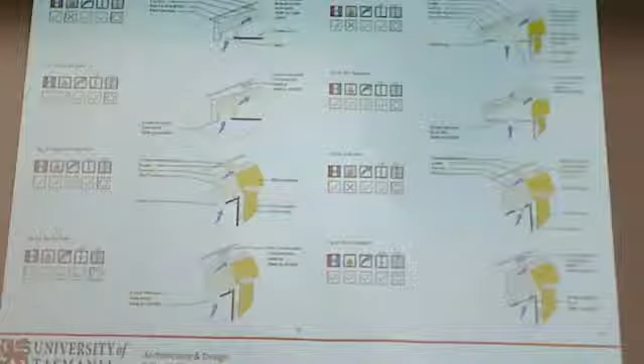If I do this, I'm being edited. Sorry.

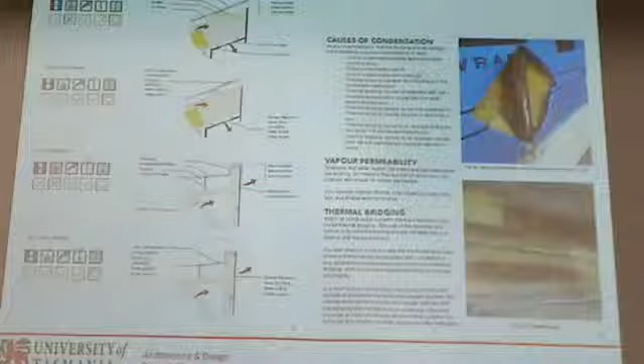Thanks for coming along. So this bit, this is not the slideshow. This is a booklet we finished a week ago, and so it's not finished. I'm probably going to look at it again in about a month's time and see all the things that are wrong with it, and come back and just tidy up a bit of text and organisation. But generally speaking, it's correct. So if you want, flick me an email and I'll send you a PDF copy.

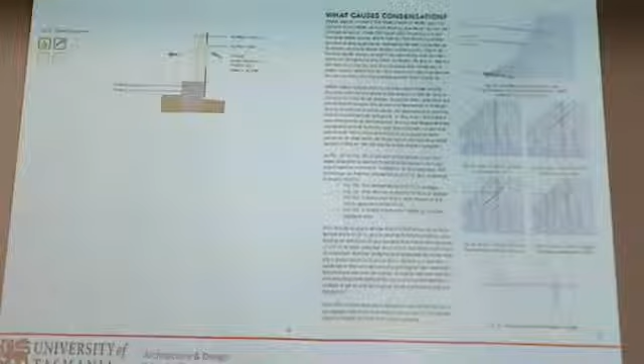We've been doing research for the state and federal government for the last 7 years on condensation and mould in Australian buildings. And as part of that, given talks in Darwin, Perth, Bunbury, Brisbane 3 times. South-West Queensland has huge problems. Sydney, Melbourne, everywhere except for Adelaide. But Adelaide's got a nice dry climate. So that's what that is.

Yeah. Got nice beaches though. So that's what's been playing in the background. So I'm happy to email that out to people. Yes. We can do that. I'm in this room. It's old fashioned. Yes. That too much or not enough? Oh, yeah.

I love that. Good. So this talk is going to be not a dog's breakfast, but a bit of variety. I originally started with is energy efficient housing a health hazard, and it is. There are lots of issues with that. But considering who might be coming tonight, I made it a bit more general as well. So I'm the nexus of how to design low energy buildings, how we empirically validate that, and how buildings are built. Empirical validation is how we measure them. Most of our regulations now and probably into the future are about how we design them, and there's very little measurement of how that should work.

And I get lots of award-winning buildings, which are based on a design, but how that should work's a different story. And then how they're built. In that context, a recent review in Victoria found that more than 80% of buildings were non-compliant, meaning that we've got the building regulations, which are the minimum requirements for construction, and 80% were built less than code. And that's not just energy, but other aspects as well, fire escapes, toilets, all different things that were not compliant.

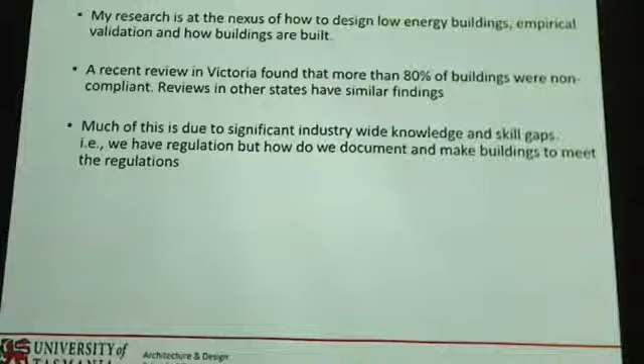The problem is there's two sides to improving compliance. One is training, and training is actually going the opposite direction, getting less and less. The other side is inspections: the people who do the inspections need to actually know what they're inspecting, and a lot don't at this point in time. And inspections are going to cost money. Every time that's mentioned, the affordable housing flag gets waved, and that's the end of the story. But the fact that 80% aren't built to code doesn't seem to matter. So we have this to and fro.

And yes, yep. The likes of, what's it called? Grenfell in England. 3/4 of large high-rise buildings are non-compliant in Australia at this point in time, including many public buildings in Tasmania. So, yes.

So as informed Australians, we acknowledge the need to reduce carbon emissions by improving the thermal envelope and equipment performance of all buildings. However, since 2004, the focus in Australia has been on stars and watts, as in watts per square metre, without a deep understanding of how the building works as a system.

I'm sure you've all seen these sorts of images, how our CO2 emissions keep going up and up and up. How our ocean temperature is rising, and was it on the news last week, tropical fish that used to exist 3,000 k's north of New Zealand can now be caught off the waters of New Zealand. So a fraction of a degree, and that's what we're talking about, a fraction of a degree increase in ocean temperatures has a huge impact on the whole planet.

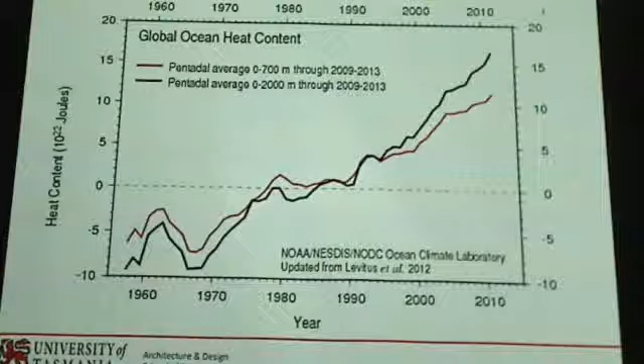75% of the planet is oceans. So what's happening on the land we're on is quite small compared to what's happening in the oceans. And I guess it's like you take a glass of water out of the fridge, and if you had a really good measuring device, the fraction of a millimetre, as we leave the glass on the table, it actually increases in size because the water's warming up. And so think about it at a planetary level, and that's a significant issue.

The other issue is this: Australians still have the biggest houses on the planet. So we talk about climate change, but we at the same time have the biggest houses. So it's a bit of a contradictory statement there. And then we take it down to what's that mean at a square metres per person. So Australians have 89 square metres of house space per person. So that's bigger than this room per person on average.

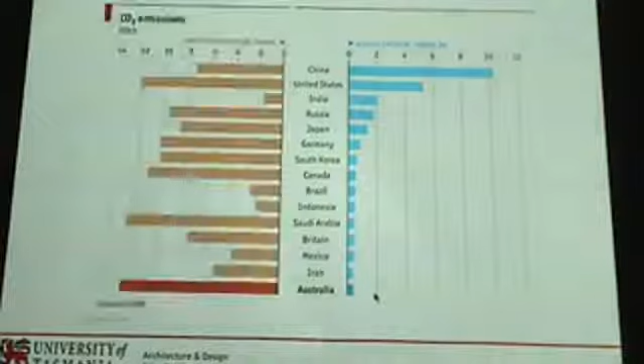And then this is the thing I guess we often see from the government's perspective. Oh, Australia's not doing anything. Look, we're tiny. We're doing this. We don't count. Iran makes more. But then when you actually flip the coin and say, what's it mean per head of capita? And Australians are the worst carbon emitters on the planet. So that's an interesting situation in itself.

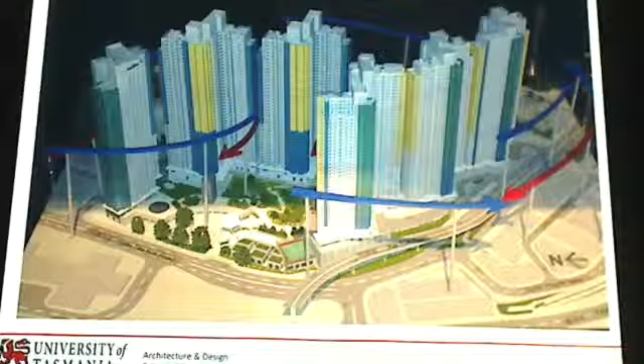And every single room has access to daylight and access to an operable window. Now that doesn't happen in Melbourne, doesn't happen in Sydney, doesn't happen in Hobart. We have many apartment buildings where you can be 3 or 4 rooms in from where the window is. So Hong Kong has better regulations for apartments than Australia. So, yep.

Hobart is one of the most unsustainable cities on the planet. And that comes back to that same reason. The population of Hobart's about 200,000, but the land mass that's occupied by Hobartians is phenomenal. So it's one of the most unsustainable cities on the planet. Might be a nice city, but it's extremely unsustainable.

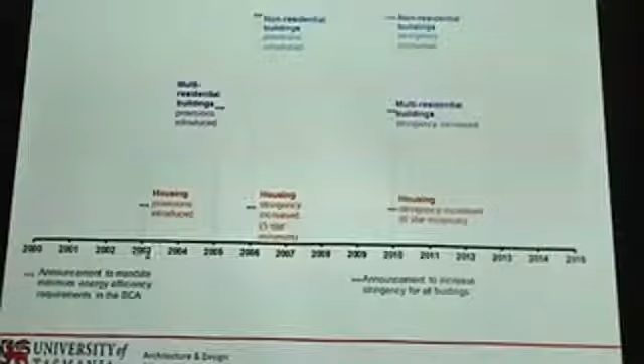And so regulations: in 2003, we had our first regulations regarding, we need to do something about energy in buildings. It was talked about in 2000, but it took to 2003 to put it in the regulations. In 2005, 6, 9 and 10, we've had various improvements, or a desire to reduce the energy used for heating and cooling in buildings.

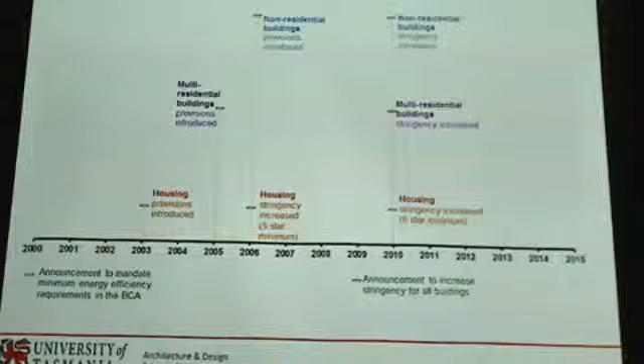And more recently in 2016, more aspects about hot water and insulating hot water pipes. Some hot water pipes. I went to a house the other day and not a single hot water pipe was insulated. So we're happy to heat the water to 60 degrees and then let it sit in pipes that aren't insulated.

So that's where we're going. And at the moment, the next code is in 2016. It's coming out at the end of this year for action in May next year. At this stage, there's no changes in the energy requirements in residential buildings.

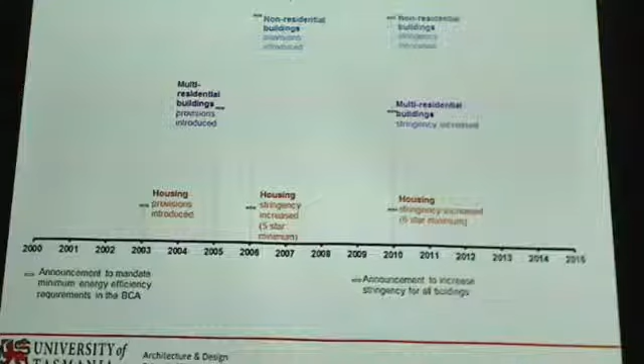What it is, thankfully, or at last, there's been lots of broad statements. You must use natural energy, or your house should not leak so much. And hopefully, if it passes all the different approval processes, we'll have some numbers in there about what that might mean. So it might state, for example, that your house might only be able to have 10 air changes per hour or something as a number that we can actually use to say, well, it is or isn't.

But this is, I guess, where the challenges we have within regulation. The greeny brownie colour, it's not brownies, it's more green than yellow, blue, green, brown. Architects get stuck on colours. Khaki, thank you. I like that.

We're talking about residential buildings, energy efficiency, thermal performance, orientation, ventilation, thermal mass, insulation and glazing. And I guess the challenge there is that all that stuff on the outer edge, there's no regulation. Okay, that's fine. Sorry. So, we can see the electricity system, reliability, affordability, sustainability, green power. At this point in time, the focus is on low energy, more so than what's actually the source of energy. We're lucky in Tassie because we've had our hydro system and a significant amount of our power generation is renewable. But other states aren't as lucky.

Vehicles, what type of fuel is it? I've been driving cars that use 4 to 5 litres per 100 kilometres for the last 8-9 years. But there's still a challenge. We've got a Honda at the moment. When we bought that 4.5 years ago, most of the cars of its size were using 10 litres per 100 kilometres. We were more interested in the look and the apps on the car rather than how it's impacting on climate change and fossil fuels.

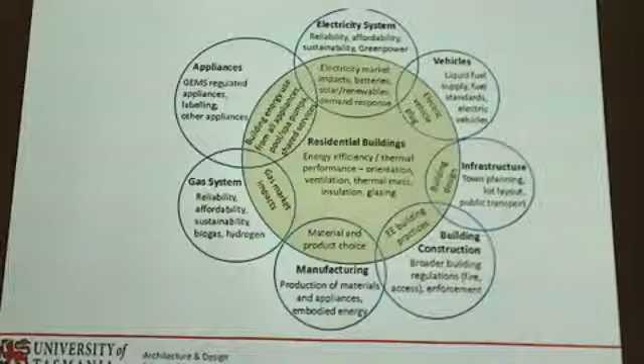Oh, I know. No. And they're not designed for universal access either, in terms of when you break your leg or you want to stay in the house and get old. Exactly. Yes, I agree totally. And then not compliant as well.

And then we say, how do we actually start to quantify delivered energy? Is it brown power, black power, green power, yellow power? Okay, we make more energy than what we use, but how is it exported and how does the system manage that? At the moment, it's not really managed that well. And then within the building, how are we managing our own energy use? So as we're moving down this pathway of people wanting to get points for this or points for that, there's these questions about how we're actually trying to quantify things.

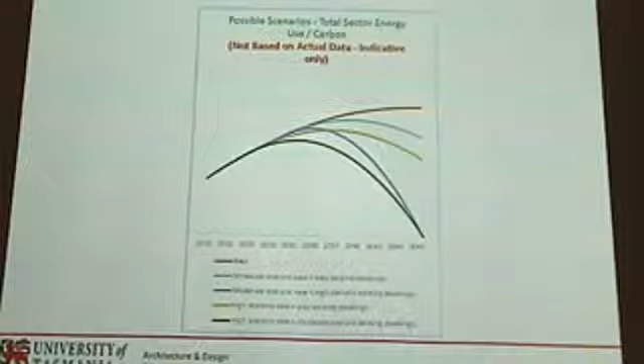And then there's this one. I call this the skeleton in the closet. Actually, these 3 slides I've just shown you won't be in the PDF version because I'm on a national committee and that's how I've got them. But this one shows that, at this point in time, if we're good and we have lots of regulatory change, our new buildings in 2040-ish will be zero energy.

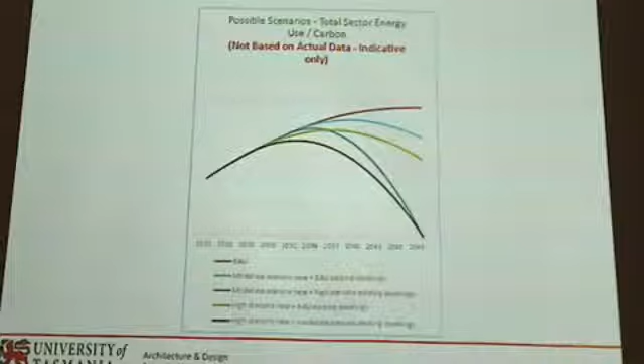Who's going to be here in 2040? Oh, yeah, yes. Okay, right.

So all the hullabaloo about desperate need for action on climate change, well, by 2040, we might be making new buildings that are required to be zero energy. So I'm just looking at the sea level rise and the ocean temperature rise, and it's going to keep going up. And that's just buildings.

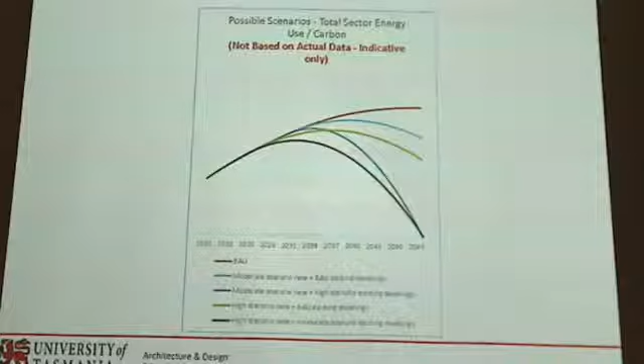Before we start talking about houses, commercial buildings, what cars we're driving, what trucks we're driving, how many highway miles we're doing, whether the mobile phone that you're using with rare earth materials gets thrown away after 2 years, all those sorts of aspects. And I'm blaming China for not accepting our recycling rather than asking the question, well, why do you have recycling in the first place?

So this is where we were not that long ago, and at our commercial spaces, we're pretty much similar. It was about 2 or 3 degrees difference between inside and outside, and we dressed appropriately, like this building.

And now we do this for houses, and commercial spaces are getting more ritzier and ritzier. So at the same time, we've had significant changes in our expectations, significant change in our building practices, huge changes in our built fabric. And the BAL is about bushfire attack level and how that's impacted on materials used in construction.

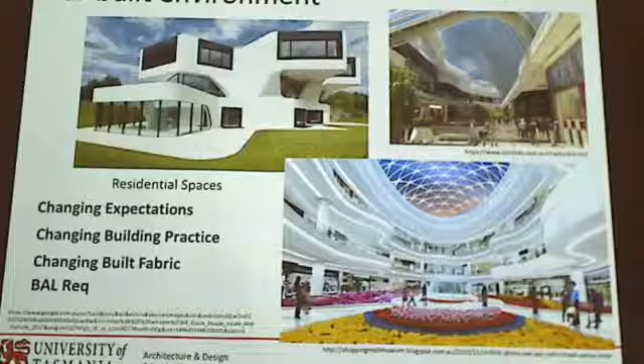This is a window in a house we did a few years back. That's a double glazed window, and that's a rammed earth floor on a 2nd story. So that's what we call a suspended rammed earth floor on a timber frame, the stuff you do.

So we have to think about thermal conductivity, that's the rate at which heat flows through buildings. Thermal mass - so where is it, how is it, how much, is it right? Insulation - so how do we think about insulation? Framing factor - that's the amount of framing material in the wall. And I talk later about what we call thermal bridging, which fits in with this, and what the insulation property of the framing is compared to the insulation value of the insulation.

Client would like it, and we liked it. Thermal mass-wise, yes. Yes, on a timber structure. No, you can't, sorry. Air tightness - and when people talk about air tightness being unhealthy, I'll tell them to go jump in the creek.

Vapour pressure management, which is about water vapour, we'll talk about that in a little while. Thermal comfort - most of the developed countries have minimum and maximum temperature requirements inside housing. We don't. We prefer unhealthy housing.

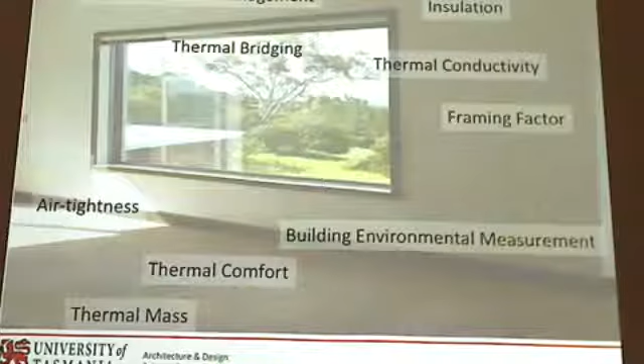Building environmental measurements - okay, we're going to do this, but are we actually measuring it to prove we've actually achieved what we wanted to achieve?

How we're simulating buildings - and I guess people who tinker in the house space look at star ratings, and all that's doing is simulating a particular scenario of the envelope of the building. It's often up to 30% different to reality, but it's purely a regulatory tool to compare apples with apples.

Human health, building regulation - that's stuff with the buildings. Go left of field now, Papua New Guinea.

And so reduce unwanted heat loss and heat gain by using insulation. So that 120 mils of grass on the roof has an R value of about 4.5. That's what's required in a brand new house in Tasmania. The wall is 110 mils thick, there's an R value of 4. That's nearly twice what's required in Tasmania in a new house.

Yes, yes, it does, yes. Shade solar radiation from surfaces and stop them getting hot. Yep, it's got nice big eaves to stop the sun hitting the facade. I'm seeing more and more houses in Tassie where there is no eaves and the facade receives full solar radiation.

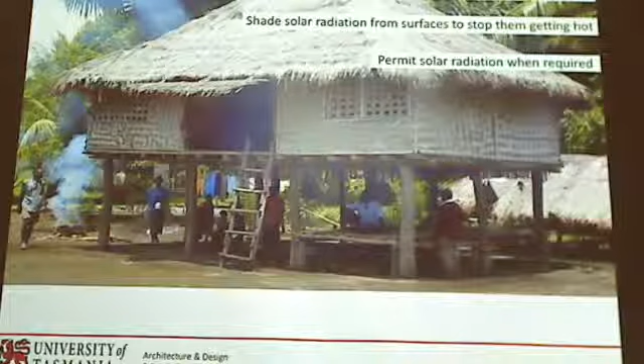Permit solar radiation when required - not really for there, but definitely for here. Appropriately sized and placed ventilation - yep, big openings, cross ventilation, lets the building, lets what heat is in there out.

Appropriate access to daylight - well, they go downstairs, where there's more daylight. Appropriate location of thermal mass - well, this is in a warm climate, there is no thermal mass. You don't want thermal mass. And appropriate amount of thermal mass? Yes, yes, yes. Cooking and other things happen down here, yes.

The larger the surface area per volume of material, the more rapid the heat flow. Now what that means, this flat surface here, because of its access to currents, it loses or gains heat much slower. The grass, how it's all woven, absorbs and releases heat much quicker. The rammed earth question before - rammed earth is more porous, absorbs energy quicker, releases it quicker.

Lots of different things. A brick wall that has the bricks stepping in and out absorbs energy quicker than a flat brick wall, or a rendered brick wall is even worse. So how about you think about materials in that context? Renewable resources - yep, the storm can blow, it blows away, get in the paddock and get fresh materials.

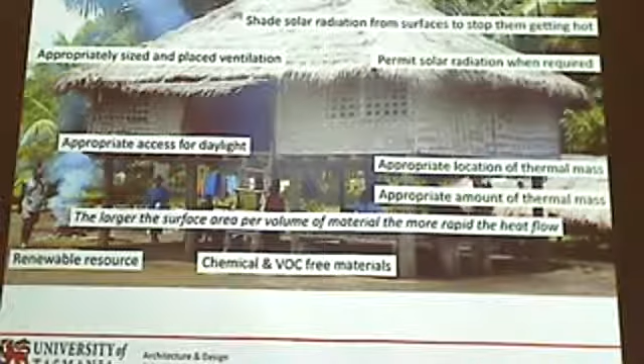Chemical and VOC free, yep, not like here. We've got formaldehyde, all sorts of volatile organic compounds that we're breathing happily, helping us die of cancer.

Carbon storage, yes - the carbon from the paddock is in the straw and the logs. Embodied energy - it's got very low embodied energy, which is the amount of energy required to make construction materials.

Carpet is one of the highest embodied energies, and so is paint. If you have a timber frame window, that's great, but in 2 or 3 years' time you give it a coat of paint, and it's now created more carbon than an aluminium frame window. So just being aware of the greater circle of things.

Embodied water - well, this is just paddock grass made into a house. I think it's like 30,000 litres to make 1 square metre of plasterboard.

So, materials - this is something I've been tinkering with quietly in the background regarding Tasmanian housing. There's very limited information available, or there's some remnants around the place.

But whenever you read, what was his name? Robinson - thank you. When he went there, no matter what season of the year, it was comfortable inside and warm.

So they had the thatched grass, they were a stressed structure. These poles went 2 foot into the ground, and as you can see, they actually went over - so it's called a stressed skin structure, which the British weren't doing until very recently. And then the grass and other layers happening on the inside. So it's interesting what was happening here before we came and tore it down.

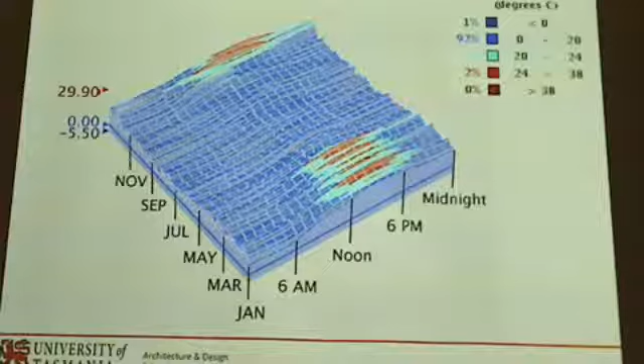If we're in Darwin, it'd be 23 to 27. So there's a bit of variation, but that shows that only 5% of the hours in a year we could walk around and think, yeah, without too much worry. Only 2% gets hot - that's right - and then 93% of the time it's cooler than what we would like.

Talking with the people from Aurora that we work with, the use of heat pumps in summer is phenomenal - for heating at night and cooling in the day. The energy doesn't drop, it's constant. So it's interesting in terms of what's happened in modern housing.

So what does that mean? Regulation. The National Construction Code goals are for a nationally consistent minimum necessary standard of relevant safety, structure and fire, health, amenity and sustainability.

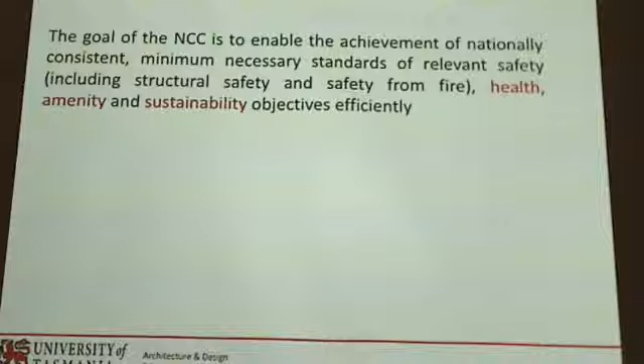So health and amenity - what does that mean? The National Construction Code is a document that follows a democratic process. It's a good example of democracy, and it's coordinated by the Australian Building Codes Board for state and territory governments.

And so in that context, the most seen and heard lobbyists achieve the greatest regulatory outcomes. That's democratic, yep. For every minister in the federal government, there's 2 coal industry lobbyists. There's 1 solar power lobbyist for the whole of government.

I was saying before about the issue of inspections to improve compliance, having more inspections. If every person is saying we need that, there's an entire workforce from particular building representative bodies in Canberra saying that'll make houses unaffordable. So, that's the democracy.

So if we want change, we have to be heard more. That's the best way of saying it. Yes, with a person who has balance of power. Politics.

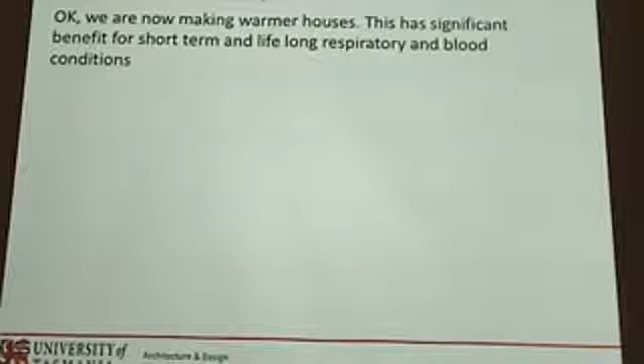But how do we count energy? How do we count comfort? Are we considering air quality? Are we considering water vapour? And by the way, what are the ideal conditions for mould to spore?

Okay, so we've warmed the houses up. What temperature does mould grow? Any ideas? Over 20 degrees. Oh, so we've now created a better condition on one hand, but on the other hand, we've now made this awesome breeding ground for mould.

This is a statement from overseas I'll put later in the talk too: buildings are often not used as intended by occupants. So designers and builders need to err on the side of caution and adopt robust, fail-safe built fabric solutions. It's the role of the built fabric to manage these issues, not the occupant.

So I guess, how many people are in the living room? Does the building regulations say how many are in the living room? Does it say how many people are breathing? Does it say that a living room of this size is for 1 person, 2 people, 5 people?

When we simulate buildings, it has presumed internal heat loads - a certain amount of energy created by laptops, computers, mobile phones, stoves, fridges. These were all presumptions based on averages. So the moment you have a bunch of friends over for a party and there's 20 people in the living room, that's 20 people breathing, 20 people giving off water vapor, 20 people's heat load. Rarely does any room operate as per our regulatory beliefs.

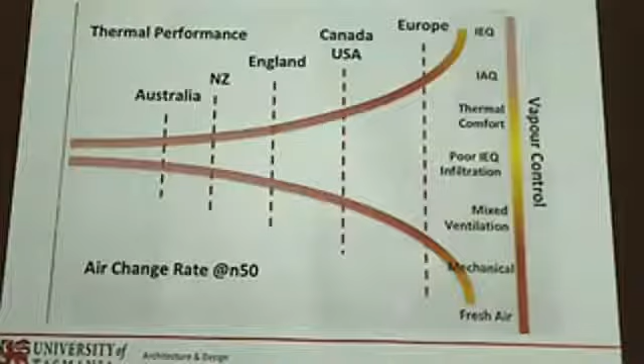So indoor, I'll just go through what those two terms mean. Indoor air quality refers to the air quality within and around buildings, so in and around, and structures, especially as it relates to the health and comfort of building occupants. Understanding and controlling common pollutants indoors can help reduce your risk of indoor health concerns.

And indoor environmental quality encompasses the conditions inside a building, air quality, lighting, thermal conditions, ergonomics, and their effects on occupants or residents. Strategies for addressing IEQ include those to protect human health, improve quality of life, and reduce stress and potential injuries. Now, that's the regulation in Europe.

And so that sort of context of what we're talking about, oh, you might need to put some batts in the wall. They're talking about, no, it's what the health of the occupant is. How do we have a building that provides a healthy outcome? So

We think about energy flow, or the envelope energy flow. We have walls, windows, doors, thermal bridging, and that includes infiltration. Infiltration is thermal bridging. Solar shading, solar gain, energy storage. Envelope durability, so how are we managing water, water vapour, thermal bridging, and fabric ventilation. So that's the way the building can breathe. So how the subfloor, the roof space, and the walls can breathe.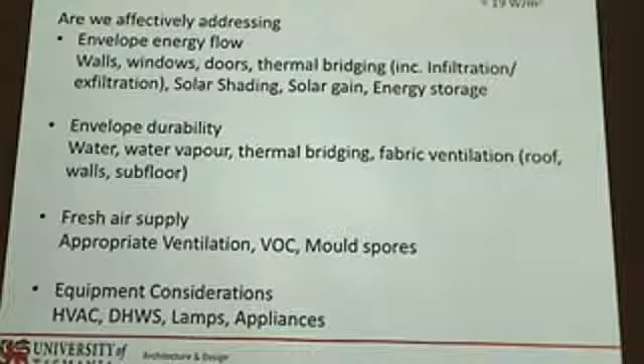building leakage. And so if the ground is on average 12 degrees Celsius, when the air above it's cooler, it's giving that warmth to what's above. And if the air above is above 12 degrees, it's going into the ground. So just understand those basic principles of energy. Yep, that's the ground heat. Yep, that 12 degrees. Coming back, I could probably go back to that graph and look at how many hours a year the air temperature is less than 12 degrees in Tassie. Yeah.

Oh, we find that at about 1.2 metres, and stuff we've measured up at Newnham, we get about a ½ degree variation every year. But that's at 11.8, about 12 degrees Celsius. And I don't want my house to be 12 degrees Celsius. Yes. But you don't want your house to be 12 degrees Celsius.

Yes. And that's one of the challenges, a lot of old books from the 1970s, before we had our expectation of comfort, things were very much about solar orientation and lots of mass and even burning. But a lot of people refuse to live in those houses now because they're too cold. Or they've retrofitted air conditioning, and because there's so much mass, the amount of energy required to condition the mass is significant. Yeah. Hydronic. Yep. But once again, it's energy to run that.

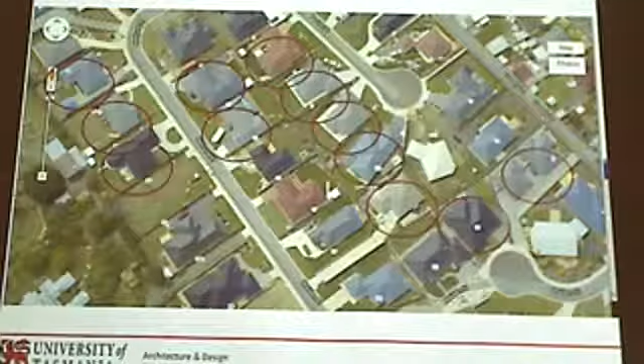So then coming back to us in terms of thermal comfort. So me standing here, 60% of what I'm feeling is actually the temperature of the floor and those walls and the ceiling. 60% of what I feel. 20% of what I feel is actually the air temperature, and then 20% is what the airflow is. So because the airflow here is less, there'd be a bit more MRT, mean radiant temperature, and a bit more air temperature experience. If there's a big breeze, it comes down at 20.

So what's important isn't necessarily what temperature the heat pump's pumping out, but what's the surface temperature of this and this and this. And that's the big focus in this IEQ stuff, is how much energy to condition that surface as efficiently and as quickly as possible. And there's a lot of stuff in the 80s, 90s regarding lightweight buildings. So have a very lightweight building with lots of insulation because it doesn't require much energy to condition that surface. And so it's having to think about what is the right amount of mass to make that work.

Yes. So if you're in a house where you've got the heat pump running at about 26 degrees, but all of these are 12 degrees or even less, you feel cold and you'll turn the heat pump up. Yes. Yeah. What, for absorbing energy and releasing energy? Yes.

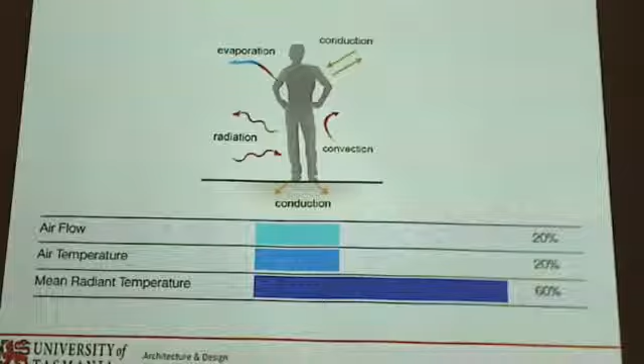Yeah. And so when we're looking at mean radiant temperature, it's about how we ensure that as much as possible what's around us is very well insulated. I was talking before about the framing factor. So how are we reducing thermal bridging? In America, walls are often 900 or 1200 between studs. Ours are still 450 to 400 in many buildings. We have double studs in corners, which most of the developed countries don't have.

And I guess how we place our windows. In many other countries, your window is required to be on this line here, not back here, because it's the insulation line in the building. So you're having to draw a red line around your whole building perimeter and work out your edge of insulation, and doors, windows, walls all line up, which has a huge impact on thermal bridging.

And single noggins or no noggins. I get them in my buildings where I see 3 or 4 noggins on the wall. So I think, oh, that's good. And those noggins are R0.9 and the batts are 2.5. We get the infrared camera out and we see a different story. Other countries require a layer of insulation outside your framing, which is once again about thermal bridging. We're still focused on putting it all in the framing. So how do we move beyond that?

Just to highlight what that means, every material has a thermal conductivity, the rate at which it absorbs energy, and its inverse being thermal resistance, the rate at which it resists heat flow. So if we had a building with 16 degrees difference between inside and outside, 4 millimetre glass will lose 4,000 watts of energy per square metre. The clay brick, 9 watts, the softwood, 20 watts, and the glass wool batt 7.8 watts per square metre. That's why you get condensation on single glazing, 4,000 watts per square metre.

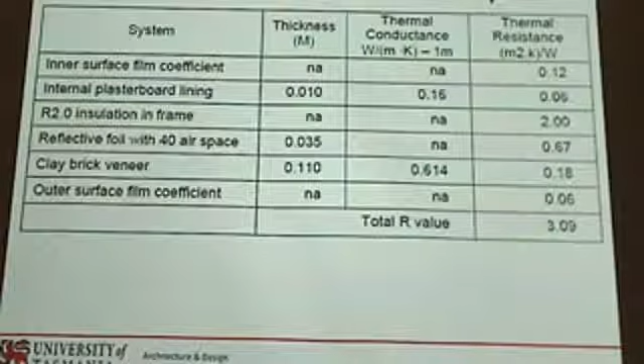No, does nothing. Yes. But then I applied what I do, which is I'm working in an international regulatory space, and they don't exist. Now, the reason why is that, well, there's a cavity. Between the wrap and the brick, there's a cavity. What's in the cavity? Air. Where does that air come from? Outside. What's the outside air temperature? Yes. So the supply air to the cavity is outside air temperature. Why do we count the brick as insulation?

And the same thing, if you actually read the 1970s reports about reflective insulation, what's required for an airspace to work as reflective insulation? Any thoughts? Static. Oh, well, we just said the cavity is vented. So, no, it doesn't work. And I can then take a step back and say, okay, so why is Australia one of the only developed countries using reflective foil in its roof spaces or in its walls? Sorry? Lobbyists. Well said. Yes, they don't use it in Italy or America or Germany because it's a vented airspace.

Well, because people are counting it as 0.67 rather than nothing. So yes, and it'll probably be another 6 to 10 years before our regulations catch up with overseas. But let's be better. So we've gone from 3.09 down to 2.24 as we're following the international standard.

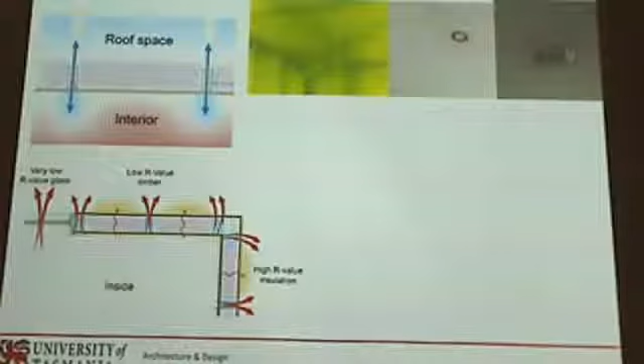This is a typical infrared camera. We can see every bit of the roof structure. This is another house down Signet Way. We can see all the condensation forming, where that's occurring. And then, of course, the downlights are beautiful thermal bridges and dripping. No, yeah. It's insulation, but also greater airflow.

Yes, which is this one. And so that's thermal bridging because of a lack of insulation. It's thermal bridging because you can see all through here, air leaking. Now this is good construction. Bottom plate, well fixed onto floor, but it leaks. You've got timber, which is its squiggly stuff. You've got the particle board, which is its squiggly stuff. They're just joined. And there's nothing stopping air leaking through that space.

And that's where we see lots of the mould in the corners. Exactly, and why in the outside corners overseas you're not allowed to have a double stud. Outside, the insulation is wrapped all the way around to stop that thermal bridging in corners.

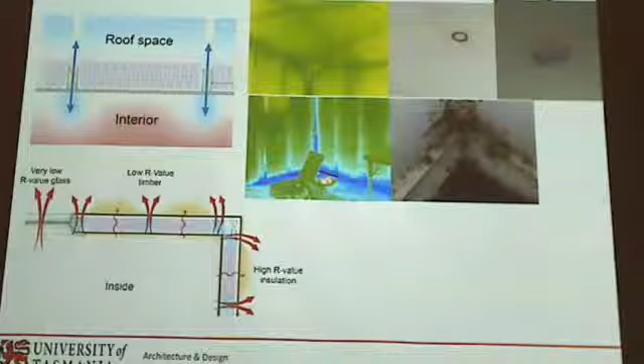And we see this in roof spaces all the time, and that's because the foil material, or the product, doesn't matter which it is, is pulled tight against the sheet metal roofing. So if the sheet metal roofing is 2 degrees Celsius, the foil is 2 degrees Celsius, and whatever moisture is in the air is condensing on the foil.

Yes, but you try find a construction site where it's not. So I know, yes. And most of the time when the CSR or Fletcher's engineers get called to court cases, they'll walk in, say not installed as per manufacturer specification, and walk out. Yes. Yeah. It's better to put the insulation on the outside. Much better. At this stage, yes.

Oh, that stops the airflow, yes. So there's an airflow issue. So the building wrap, and how we terminate our building wrap, as done in other countries, can have a huge impact on the airflow. In my practice, we've been using a double bead of external sealant under our bottom plates for nearly 20 years. And so that goes down, then the plate goes on, which stops that. And or something else, it's gone, it'll come back.

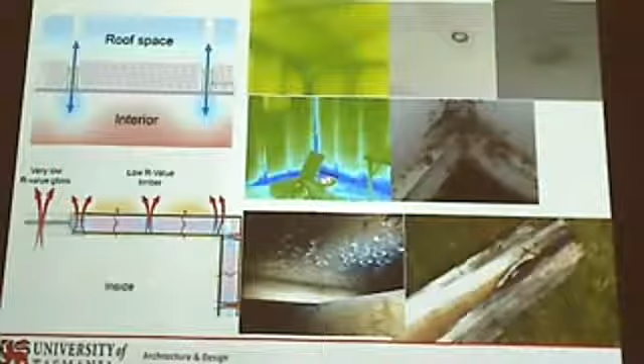I've talked before about what's happening here, and I have people say, but you applied silicone to the skirting board. And you say, yeah, but if I now feel on the top of the skirting board, I can feel a draft. Because what's causing the problem is the half-inch gap between the floorboard and the wall plate under the house. So getting under the house with a can of bog standard cheap Bunnings spray foam and applying a thin bit of spray foam where that gap is means the boards can continue to expand and contract, but the airflow isn't there anymore.

So light switches, actually that's interesting. Had a house Hobart way a few weeks ago, and all the power points are growing mould. Why? Warm inside air, quality of building around where the electrical services have been done was an issue, and so there's condensation occurring and mould growing at every power point.

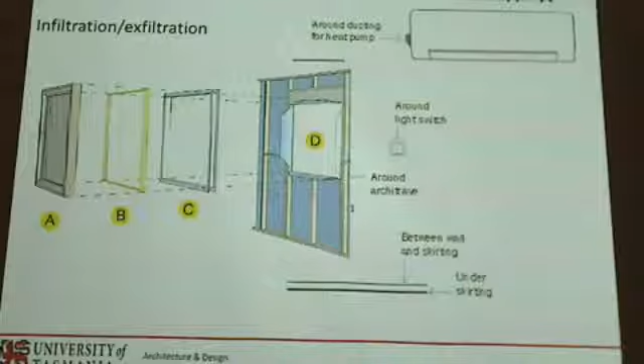The next inspection is a framing. So that looks like it's been built to Australian Standard 1684. Yeah. But most of those building inspections, when everyone's gone to court, aren't worth the paper they're written on. But yes, there's been a lot written about it, go on those chat sites. Yep, good.

So I guess that's like, was it Lauderdale? We'll be paying for a seawall there in the next 20 years out of our taxes because it's low-lying land and we've got climate change. England made several regions of the coastline illegal to build on in the 1990s because they knew climate change was going to happen and they were high-risk areas, so they're not allowed to be developed. Yeah, it's interesting.

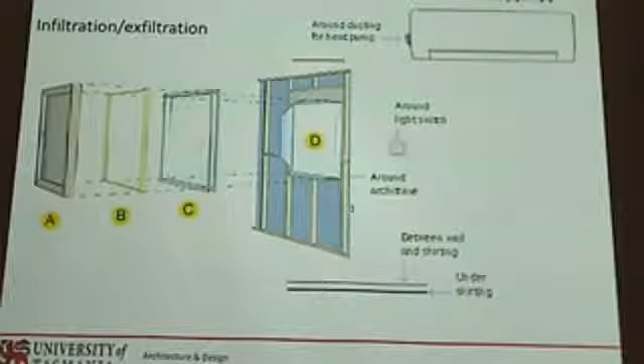Yes. Definitely. It'll be that the government regulation will respond, and that's like the bushfire attack level stuff. That was the insurance companies saying, we're sick of paying out money for houses that caught fire. So even though our premiums all doubled, we got regulation at the same time.

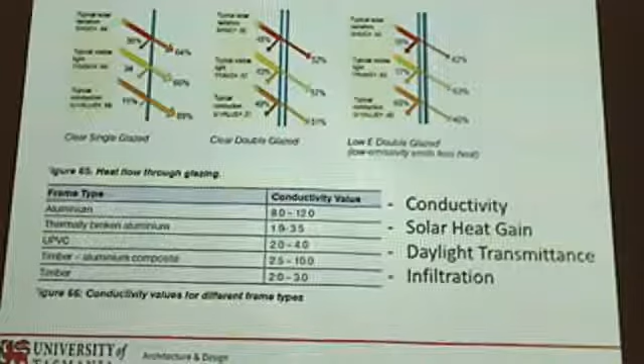I'm doing a project for a regional house in New South Wales at the moment, and we're actually just looking at where to get windows from, because it's going to be probably 300 or 400 k's from where the house is, just so we can actually be confident about the quality of the window system is. Yeah, actually maybe 600 k's.

Thermal mass - I was talking before about where it is, what it is, and how it is. So I guess a window, if we put it in the north and we're getting sun on the slab in winter, that's good. But what's happened to the slab on the south of the house? So the slab here - how is this slab being warmed? It's not, exactly - it's at 12-degree ground temperature.

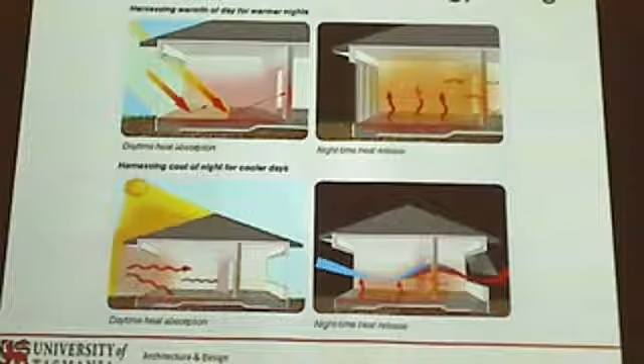The 2 reasons: one, as you mentioned, is the solar angle, because the energy hits and there's a reflection based on what the emittance of the surfaces are and those sort of things, how much it absorbs and how much it reflects. And also in winter, we're looking at probably 300 to 400, maybe 450 watts, because of how much atmosphere before the sun hits us, whereas in summer we're getting 1,100 watts per square metre. And you think about that slab on the ground, it's competing with the 12-degree ground underneath it, whereas your wall, it's inside the conditioned space.

Yes, please insulate your slabs. In Melbourne, no - and it was interesting, that's Alpine, New South Wales, Victoria, yes, inland Victoria, yes. Melbourne, because they get those heat waves, the insulated slab can actually cause the house to store too much heat. So it's interesting.

It's easier not to worry about that, actually there's no need to. If you have slab edge insulation, if you have the insulation here and here, that virtually does most of the work for you. So because you can use quite simple polystyrene here, whereas you're going under the beams, it has to be very high dense, and the higher density means it's got less insulation.

True, I guess we found that most floors we're keeping temperatures quite sensible, it's just under the raft.

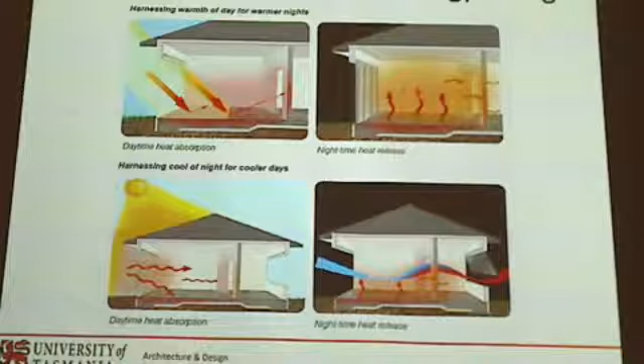Yes. So you come back to, say if I was in Sydney, yes. Because Sydney, the average air temperature is about 16 degrees Celsius. Here, the ground is 12. So there's a lot of these sort of rules of thumb and global statements where really, yeah.

I had a few arguments with Hobart Council, because we've got a brochure that talks about doing the whole house as inside-out construction. It's great for a northern room, or a room where we've got energy inputs the mass can use. For a southern room, same as a concrete slab on the ground, the only energy that's going to warm that clay brick is energy you add to the building. So you have to balance those things out.

Yes, but water, that's a designer's dream, because we have to spend a lot of time working it out. Water vapour.

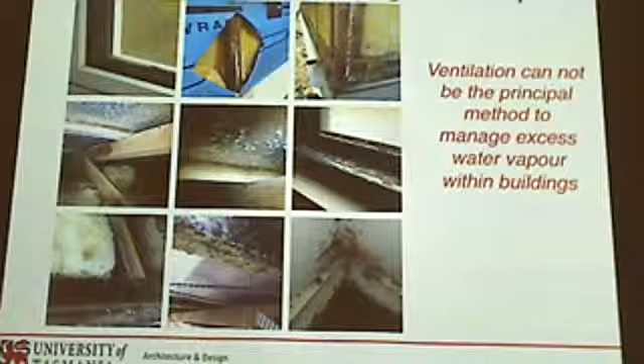I think there's a way we can say: I'm asleep, I'm making 40 grams of water vapour per hour per person. That's why in the old houses, like I have, a whole bedroom with my partner, and each morning there's condensation on the window. These are physics we can't change.

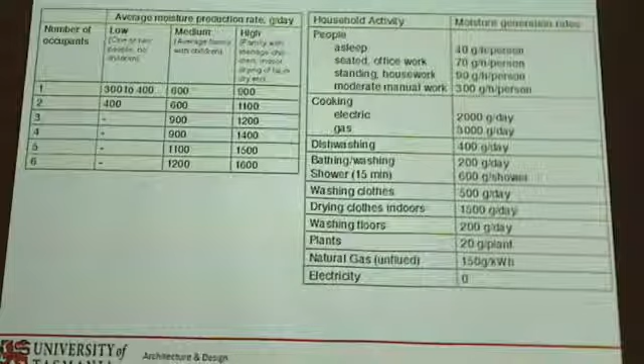Depending on how we're cooking, what we're washing, how we're showering, all these activities, we're making water vapour. Based on a few coroner's cases regarding people who've died in houses, we keep making water vapour until we've been dead for about 6 hours, and then we're cold enough that we're not making water vapour anymore. So we're the cause. We're doing it.

As a quick introduction to a bit of physics: this is what we call a psychrometric chart. You can see the numbers on the bottom, they're the temperature. This line here is what we call saturation or dew point, and these curvy lines are relative humidity.

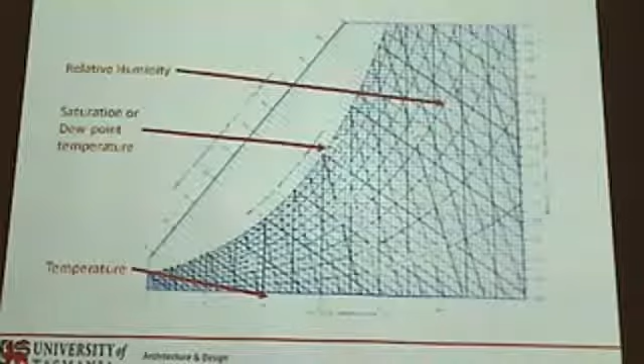Now, if I say it's 21 degrees inside and the relative humidity is about 60%, that's pretty common in a Tasmanian home in winter, we can plot that. There's our 21 degrees, we plot that line up here, then plot our 60% relative humidity, meeting this point here.

What I can then do is draw a line straight across and see where it hits saturation point, then drop that line down. Now what that shows is any surface of my building that is 13 degrees Celsius will have condensation form on it. My aluminium window and door frames, my single glazing, the bottom plates where I've got air leakage occurring, those downlights, an uninsulated plaster wall, that lath plaster wall had condensation on the inside. Why? Because it's 13 degrees Celsius or cooler.

And so that's why that's happening. It's pure physics. So if we throw in a heater, what we're doing is moving where that 13 degrees happens further out into the wall. Depending on what our wall is made from, whether that's a good thing or a bad thing. And if I've got a plastic wrap outside that, I'm pushing the water vapour to the plastic wrap, and it'll help my building rot quicker.

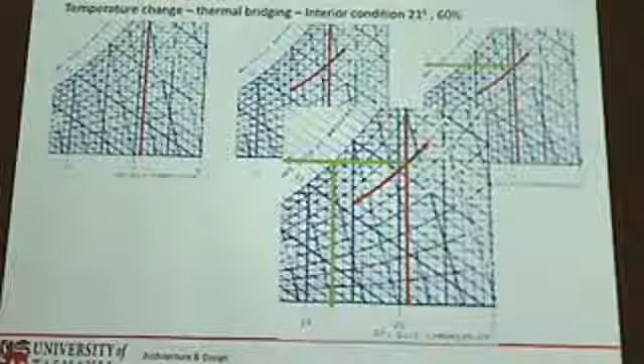So you have to be very careful about what's happening. In a roof space, we might have supply and exhaust ventilation, which passively removes water vapour because we're not conditioning our roof space. It's purely a space that needs high ventilation rates to ensure the durability of its materials. Same with a subfloor - it requires vents to remove water vapour and ensure durability of construction materials. But in the house, unless we leave our windows open all the time, we're not letting the vapour out if we're saying it's done by ventilation.

And, oh, I've got a movie. So this has temperatures down here and a date. At the moment you can see there's a foil product here. It comes off just after the video starts. And I want you to watch what happens to the steel, which is always interesting. There's sheet metal behind this. Okay, there.

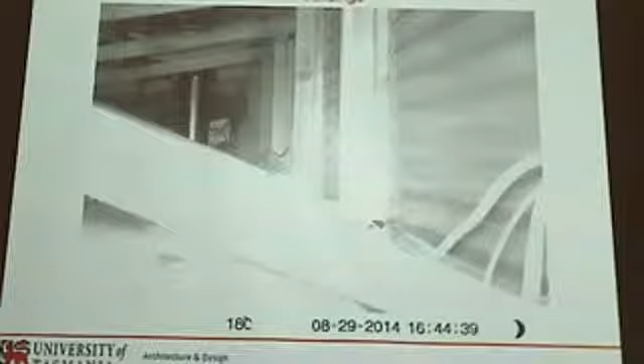What happened, do you even notice it? I'll go again. Look at what the colour of the steel is, or the tone of the steel. So it's quite flat tone there. And now it's quite shiny. What would the shiny indicate? Moisture. And it was 18 degrees Celsius.

This whole thing about understanding - if I increase the humidity in the air, dew point goes up. If I increase the temperature, dew point goes up. If the outside conditions get more humid. So this relationship between inside and outside is continually moving. It's not just 11 degrees or 8 degrees when condensation occurs. We can see there it was 18 degrees and we got 8, and that whole sheet metal has got condensation forming on it. And that's going to run down to wherever it can run down to.

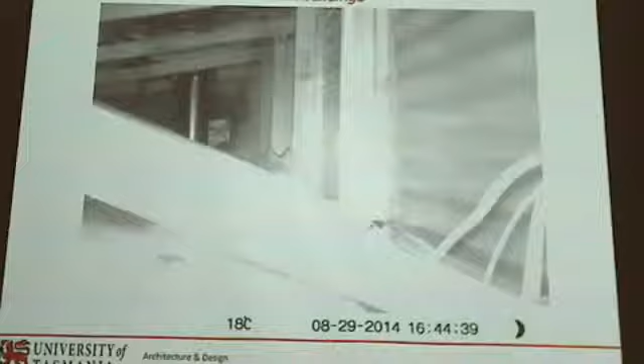And because you can see condensation occurring in the roof and different things as well. And you can see the mould growing and all that sort of wonderful stuff.

Around the entire perimeter, there was mould growing on the inside of the house. Yes. That's why we didn't have a problem before - when we didn't have houses, we didn't have a problem. It's just our expectations for it to be nice and comfy. Yes, you can see the batts.

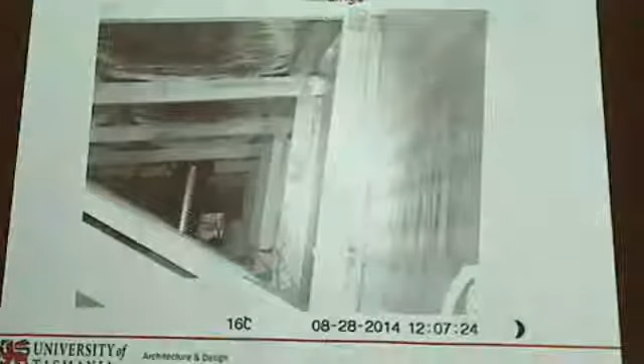So you think, you've got all that water vapour from us inside the house, and it's leaking out wherever it can - through the plasterboard, through downlights, exhaust fans. This one was externally vented. But all that vapour is pushing through the walls, through the floor, and through the ceiling, based on the vapour pressure differentials, so it's just pushing out in every direction. Some of it's going to the roof space. Then how the roof space deals with that water vapour is the next step in the process.

Oh no, go back a step. What is the occupant's job? To live, just live normally. And there's no clothes dryer. But then I go back a step - if a person uses a clothes dryer in the house, why isn't the house built to manage that? So who's at fault? Not the occupant, that's what they do.

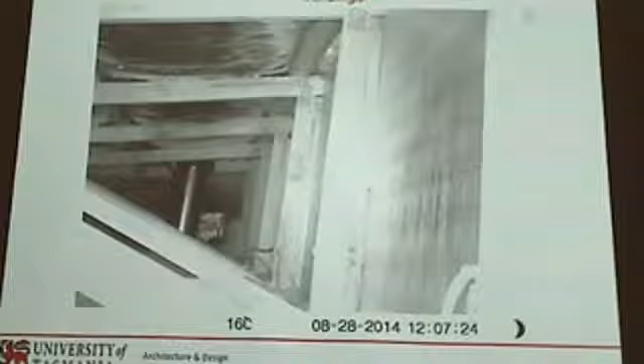Probably because it was a very leaky building. Yes, yeah, yeah. Yes, yeah, yep. Yeah, yes. Well, it's sucking all the air. Yeah, yes.

So I guess in summer the water vapour wants to push into the building because there's more water vapour in the air outside. In winter, whenever the temperature outside the house in Tassie is warmer than inside the house, the water vapour wants to push in. Whenever the air temperature inside the house is warmer, the water vapour wants to push out. And so it's about how you think about that fabric that allows that to happen passively 24/7. It just happens in the background. You don't know it's happening.

So, for example, polyethylene, which is often used in building wraps, is vapour impermeable. So the vapour gets to that point and can't go any further. It wants to go, but it can't, and it just keeps building up in the wall.

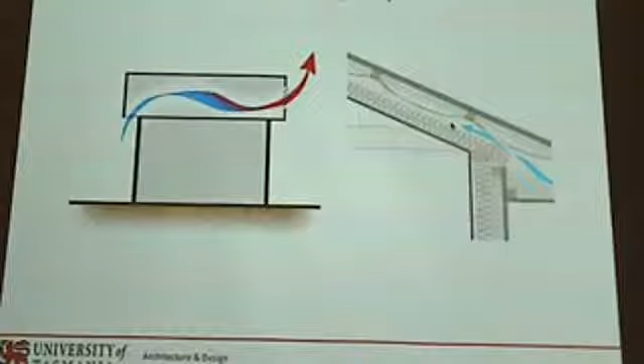And I guess I've probably been talking too long now. So a traditional wall, we had a water barrier on the outside, bit of sheet metal, bit of timber, and we had our lath and plaster on the inside. That was it. There was nothing between them. And then we said, we need to add some insulation in, which we did. And we found, oh, it's getting wet because the weatherboards are wet, it's getting wet because the bricks are wet.

So we said, well, we need to put a barrier in there. But the problem is most of those barriers were polyethylene and actually created more problems than they've solved. So this is where we need to have that cavity, which we call a drainage layer. Other countries call it drainage battens, drainage zone, which is that gap between the cladding system, whatever it is, brick, timber, steel, cement sheet, and the framing system. So the water vapour can go out.

If it gets cold, it condenses, but it's outside the building. Also, that barrier is now your primary water barrier. So that membrane, because weatherboards aren't waterproof, bricks aren't waterproof, cement sheet's not waterproof, all those things permit water through. So your building membrane becomes your first line of defence as a proper water barrier.

It's also a vapour control layer because it allows vapour in and out between the conditioned frame and building and the unconditioned cavity. And it's that air barrier. We're talking about how is it terminated, how is it taped, where does it come to stop airflow between inside and outside. And Gore-Tex does that. Your hiking jacket allows you to leak out all your water vapour, and it can rain and it doesn't come in. So it's not a new thing.

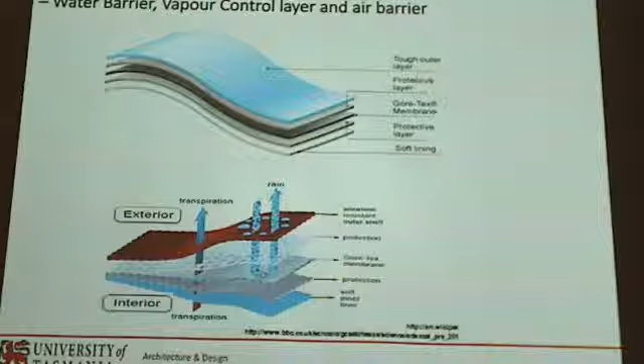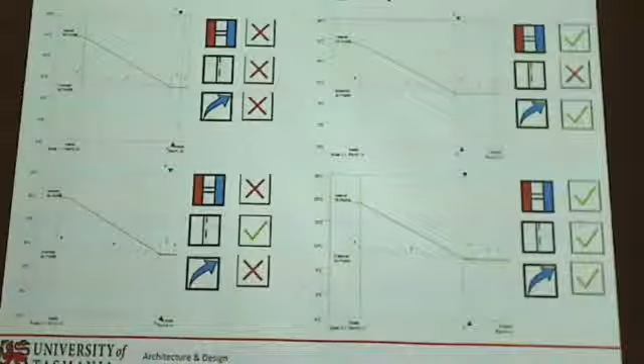No, because if it was a pure clay brick, no. If it's more than about 3 to 5% cement stabilising, no, because the cement does its thing. There's a grey area there where things can go wrong. But because it's a homogeneous thing, as the vapour is condensing, it's just being absorbed by the whole system. And then as the brick warms up again, it just leaves. It's not being stored in the brick. It's able to leave and come without too much energy. You're not going to have a mud brick house.

This just talks about air, what the regulations say about air, how it's supposed to be providing fresh air and how we do it. So I won't go too much on that. But what it's relying on is that air pressure differential between inside and outside. So on the windward side, we have a positive air pressure. On the back part, we have the negative pressure, and how windows do and don't work. So you can say, we've got cross ventilation, but if we close the door, we don't have cross ventilation. So in terms of what beliefs are and what realities are.

And in the UK, it actually states what is the required airflow based on what the function of the space is and how many people are in it. And so the regulations state you have to have this amount of airflow. But if I'm closing the window in Australia, I don't get that, do I? So what we're doing in Australia, we're relying on our buildings being leaky, which is thermal bridges, to meet these requirements.

And every time people talk about air tightness, they say, but we won't be able to breathe. Oh, but we need air tightness to manage vapour. We need air tightness to manage energy. We need air tightness for many different reasons. So that's a bit dumb.

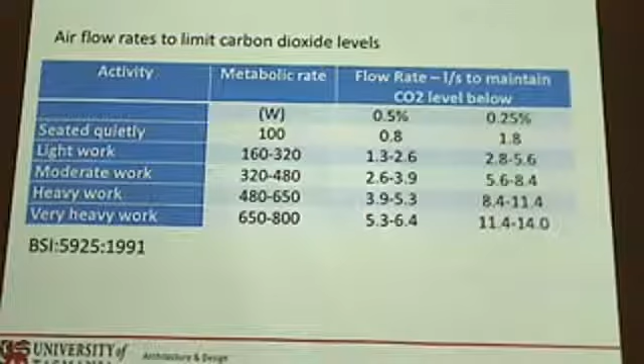So in England, if you're using those windows, you have to double your operable windows to allow the ventilation to work. And yeah, so it goes on. And stack vent and single-sided. So if you want single-sided, you have to have more windows and stack ventilation. So they've actually said, depending on what your ventilation strategy is, how much needs to be operable to provide ventilation. And England's probably the most backward of the European countries.

Yep. So having one on that side high and one on this side low. Yep. A traditional double hung window where you can actually open both. Yes. Yeah. Our regulations are based on double hung windows. Yep. That's why it's 10% for daylight and 5% for ventilation, because when you open top and bottom, yeah. But yeah, you need to do a bit of maths to work out what that means when you're trying to convert it. And as I said before, who leaves their windows open all the time? So we're all breaking the law because we're not allowing enough fresh air into our houses.

So we have different options. We have supply air. There's various companies that say, oh, buy our thing, we pump air into your house. Okay, but where's it go? If I've got a house that's supposedly airtight, how's it pump? It's like the toilets in some pubs or restaurants, you open the door and the thing goes, yay, and the door closes and the thing goes, because you need supply and exhaust. So just pumping air in doesn't do anything. There's other ones that say, oh, we extract the air from your house. If you're extracting the air, how's the fresh air getting in?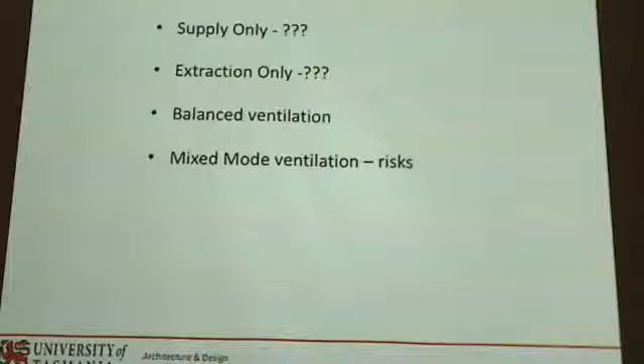Generally 5 air changes per hour at N50 is internationally recognised as the benchmark between a leaky house and an airtight house where you need mechanical ventilation. Now, these mechanical ventilators from overseas don't use much energy. They're very low energy products. They look like this. So they're taking the warm air from the house as exhaust air and using that to preheat the incoming air.

I was in Perth the other month, in a tiny house that was being finished off, and the thing was literally about that round, about that thick. It was just going in the kitchen wall. It all fitted in that little gadget, and that was taking the moist air from the kitchen and the bathroom and using that moist air to preheat the incoming air and providing fresh air to the house at the same time. So, yes. And often you can see that it says water drains through, so depending on which system you have, even the most basic ones take the moisture out of the air and dump that moisture.

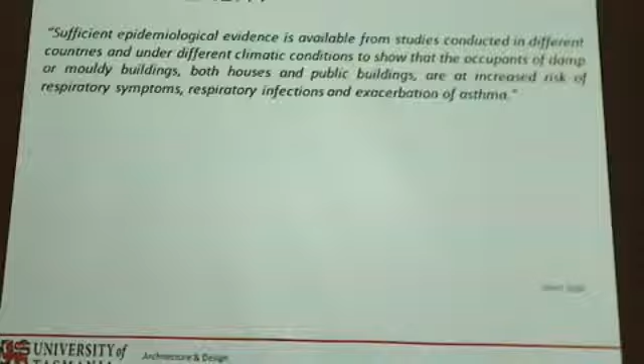Human health. So this is just about mould. This is 2009 from the World Health Organization. Sufficient epidemiological evidence is available from studies conducted in different countries and under different climatic conditions to show that the occupants of damp or mouldy buildings, both houses and public buildings, are at increased risk of respiratory symptoms, respiratory infections, and exacerbation of asthma. That's been internationally accepted since 2009.

We have no regulations whatsoever in Australia. Most of the developed countries do have explicit regulations in their building codes about no condensation, no mould. Full stop. We don't. Yes. Yeah. Yes.

But that shouldn't be, but yeah, once again, because it comes back to this belief that it's the occupants at fault, not the building. And it's the building that's at fault. So, yes. Yes, it does. Yep, it does.

And I guess we all heard about the issues about Hobart Hospital. I had many late night phone calls with the building regulators regarding Dunalley Primary School. I could say that it wasn't necessarily fixed the way it should have been. Hobart Hospital, Perth Hospital, Adelaide Hospital, 3 hospitals in Brisbane. So the public ones hit the news the most, but people's houses,

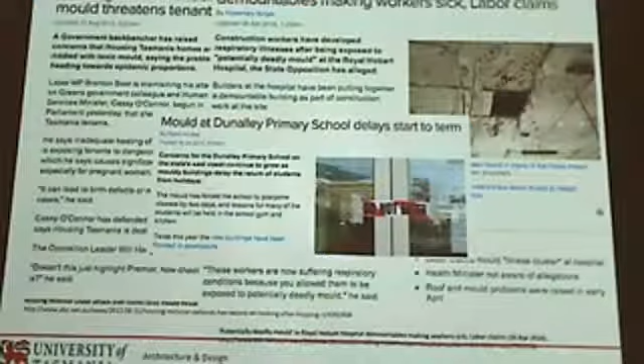The rest of us, if we're in a situation which is significant, our body eventually trips. And once again, we've then got that lifelong condition. And whenever we enter a space with that condition, we will then immediately respond. Our immune system immediately kicks into gear. And so that's why it's internationally recognised as a significant issue, just not in Australia. And so we go visit houses, and my staff have to wear masks and things.

We had a German lady ring us about 3 years ago, and she was really concerned. We went, house looks fine. We're up in the roof space, and she took me to a rafter that had a patch of mould about this big on it. She said, "That's really bad." I think, oh. She said, "But that's illegal in Germany." So just that different perception of what we accept compared to what people in other countries are willing to accept.

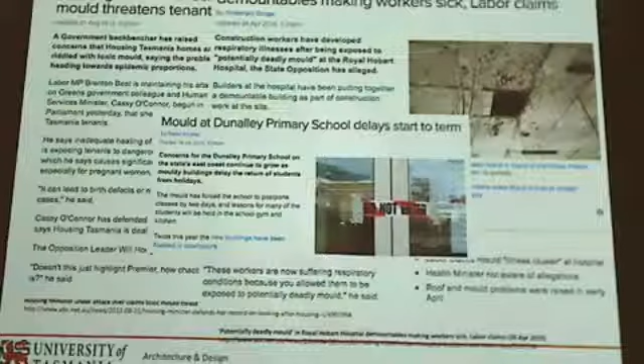And I guess in that context, government and private rental agencies, in their leases, say condensation and mould is a problem of the home occupant. It actually says it on Housing Tasmania's website. Yep. And the moment we change the regulation, well then all these... so, you must leave a window open in every room. It actually states it in the documents, all year round.

And then architects and designers and engineers: nothing to do with me. We built to code. We've done what we're supposed to do, and you must be causing the problem, not us. And builders the same: we built the building as per the approved drawings. Blame the architect, the designer, and/or it's been built to code.

Yeah. Yes. 5 years? 6 years? Yeah. But we're the only university doing it. Yes. Even in New Zealand, they get taught it.

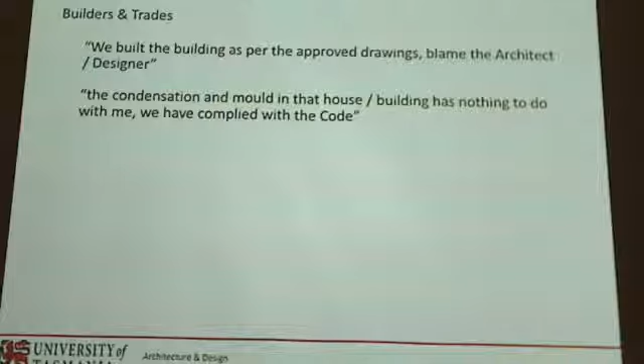I will say that Tasmania, because we've been very active in this space for the last 5 years, is probably the most active across the sector compared to most other states. We did a guide for the state government in 2014. We know that's been in common use in New South Wales, Victoria and ACT. That slideshow I had at the beginning is the next generation of that guide, and that'll be released in Tasmania in the next few months. And through intergovernmental agreements, it'll be picked up by Victoria and ACT again.

The problem is that they're a guide because there's no regulation. You can't force people to do it. But if the building owner, the client, wants it done, that's what you can ask for. And so, yeah. Yes.

And I've even had builders ring me and say, look, this architect or building owner or draftsman's got nothing, because then they've got the documents to build. And I said, look, just print out that guide from the government and take it to the person you've got a contract with, which is a homeowner, and say, this is what the government says I should be doing. So there's different avenues of who's in contract with who, what protections are in place, and how to try and make change.

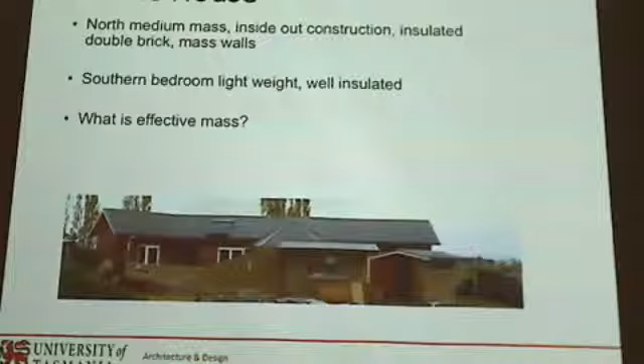Just three very quick slides. This is a house we did at Evandale, probably 6, 7 years ago. This house had northern medium mass, so the whole thing about how much mass we had. Bits of double brick, but all insulated. Mass walls inside the building and some inside-out construction. The southern bedroom was very lightweight construction, but well insulated. So these questions about what is effective mass.

We originally said to the client, just open it in winter, but she leaves it open all the time. And that excess heat from the living room is just heating the bedroom for free. So balancing those sorts of things out. Sorry? Yes, it has actually done better than planned. Much better, it's good.

You don't want a room to go below about 13 degrees Celsius—13 to 15, actually it's 13. 15 is an international benchmark for a range of respiratory disorders, so 15 is cool, and that's the sort of benchmark temperature.

It's fun when you're young, but as you get older, things go wrong.

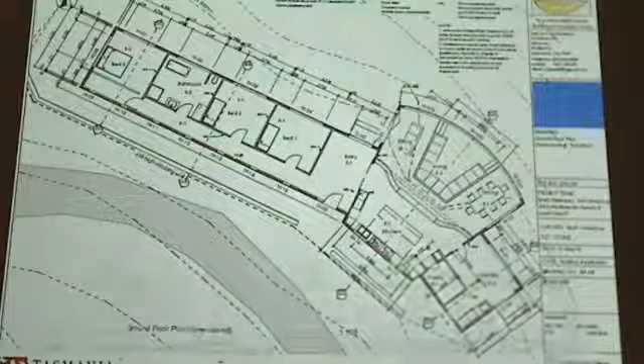This house had too much glass—that's the wind wall elevation. I discussed with the client the need to reduce glazing, and we wanted that much reduced. So this would probably have been about an 8 star rating, but it's got 2.

So understanding that, balancing between what you do—this is a house that's currently just finished sketch design, getting into design development, for Alpine, New South Wales. For those who know straw bale, yes, it's a straw bale house, R10 in the walls, and we're pretty happy with the glazing ratio. This is a mud brick wall through here and here, although we're thinking about making this one out of hempcrete, just because it's less mass and might work better.

There's an attic up above the kitchen, so you can see the stairs going up here—that's the master bedroom and ensuite above this. The roof is actually a curved roof, and it's at its lowest point here, because the house gets wider it's a higher curve at this end, just naturally.

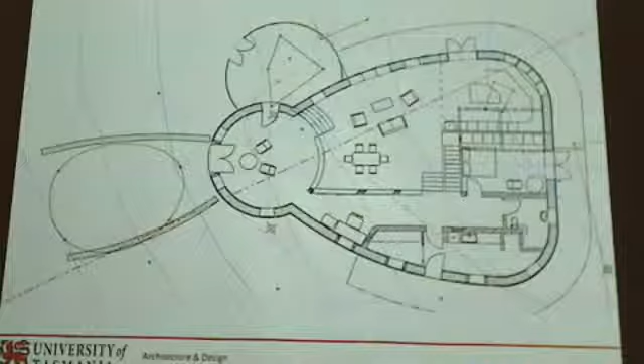Nice—there's things to do. There's no magic bullet; our role is to manage risks, so understand what the risks are and how we manage them.

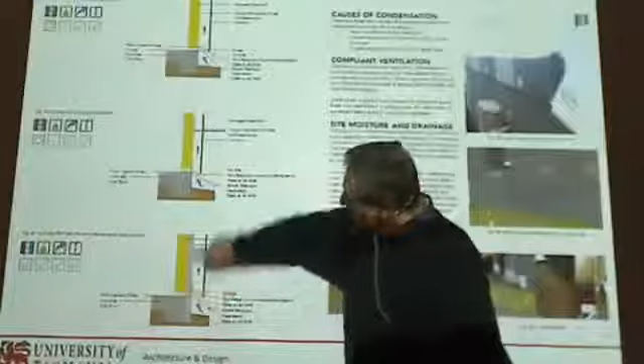The wall—so yeah, you can see here how that's a quick... well, that's the same, but we've got the slab edge insulation and the other insulation coming up. So polystyrene, expanded polystyrene, is vapor semi-permeable, it allows the vapor to travel through. Extruded polystyrene is vapor impermeable.

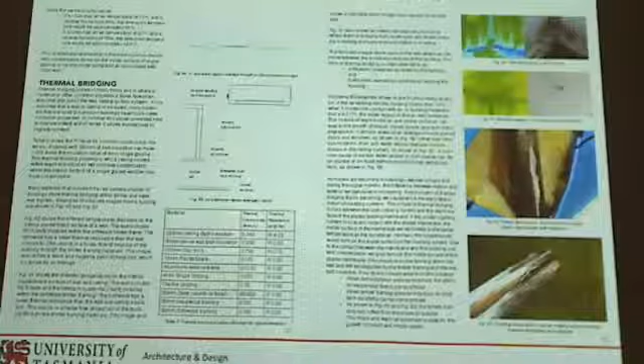Rock wool—most other countries require you to put a layer of rock wool outside your building. It's a rigid batt insulation; there's a company in WA that provides it in Australia. When you see photos of buildings being built overseas, the frame goes up and the whole building gets wrapped in greeny grey stuff, which is rock wool insulation, and then the membrane goes around that, getting rid of that thermal bridging.

The other risk is, with a project I'm looking at at the moment, plywood—there's a person building things into plywood structures. If you have the cavity, it's about how the plywood can manage that moisture. But if we had the whole thing wrapped in rock wool, the dew point's now moved out there, so the plywood won't get condensation. We're not going to stop condensation occurring, we're just going to try to force it to occur in a particular location.

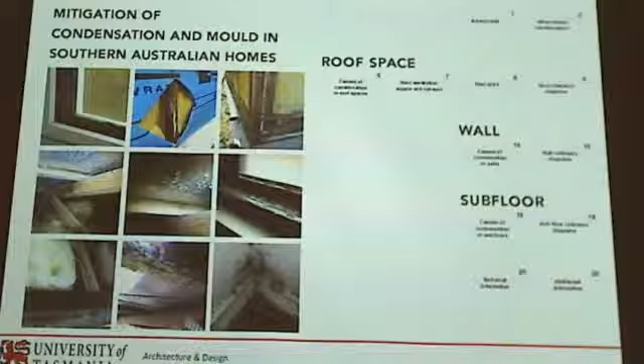Understanding this—Americans overclad all their houses from about 20 years ago with OSB, that's the chunky oriented strand board.

Yep. Yeah. Exactly. Yes.

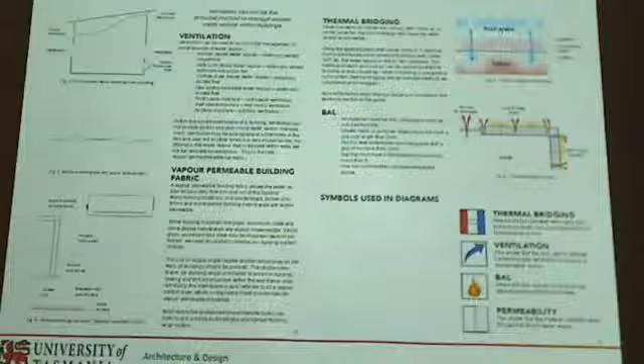They start at 1,200 centres because that's how long the sheets are, and so all of it's insulation. But then they had a lot of problems with the OSB rotting because of dew point occurring, so then they started wrapping everything with a layer of insulation to protect the OSB.